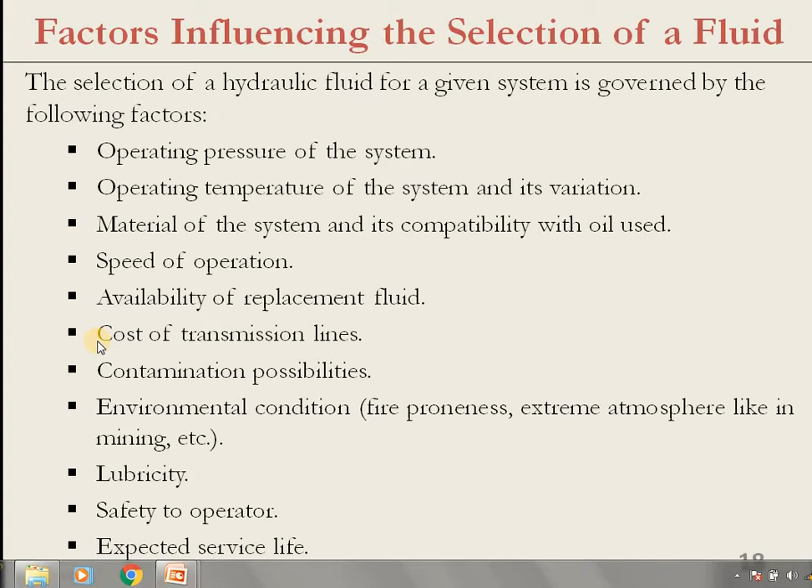Clear? Understood? So next we come to the next topic, lubricating oil additives. Why? We previously studied the different types of hydraulic fluids, properties and functions of the hydraulic fluids, and which parameters to keep in mind while selecting any hydraulic fluid for an application. We discussed all those things. At the same time, if you come to the functions of the hydraulic fluid, one function is lubricating, that is, the hydraulic fluid acts like a good lubricant. That is a very important thing.

At the same time, if that hydraulic fluid is working at a higher pressure, the properties of the fluid are going to change. Is that right? So in order to maintain those properties of the hydraulic fluid at the normal stage, you can go with some additives. You can add some additives to enhance the properties of that lubricating oil. That's why you can concentrate on these additives.

Additives means what? It is an external agent, right? You can add it into the hydraulic fluid to enhance its properties, nothing else. Okay, so that is the first point. In the first point I am telling you, lubricating oil additives are used to enhance the performance of the lubricants and functional fluids. Okay, so this is the lubricating oils.

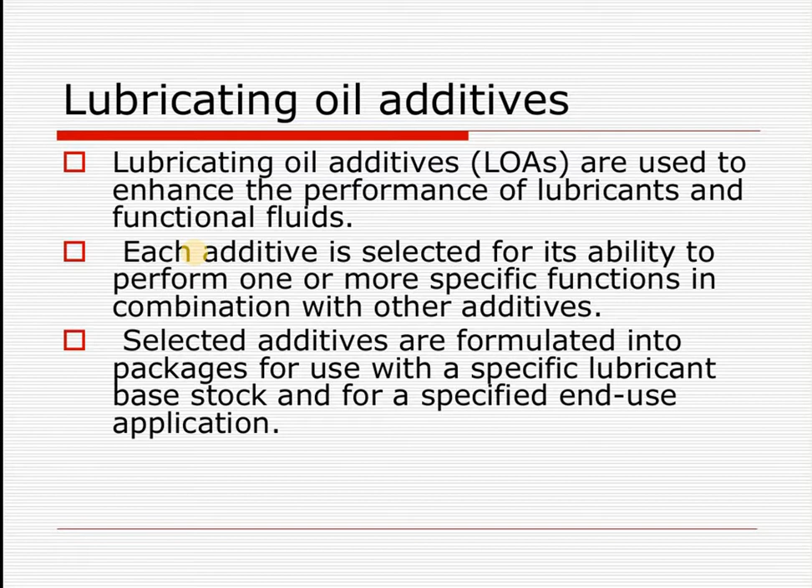Selected additives are formulated into packages for use with the specific lubricants, the base stock, and for the specified end use application. So if you come to the classification of lubricant additives, basically there are three types. First one is the surface protective additives, second one is the performance enhancing additives, and third category is the lubricant protective additives. These are the main three different additives for the different applications.

If you come to the first category, that is surface protective additives, in that there are total 6 type additives like lubricity additives, anti-wear additives, extreme pressure additives, tackiness additives, corrosion and rust inhibitor additives, and detergent additives. These all come under the surface protective additives.

The second category, performance enhancing additives: viscosity index improver, pour point depressant, demulsifier, emulsifier. These 4 additives come under the performance enhancement of the lubricants. And third one is the lubricant protective additives: oxidation inhibitors, foam inhibitors. Clear? So this is a brief classification of the different lubricant additives for the different applications. We will discuss one by one.

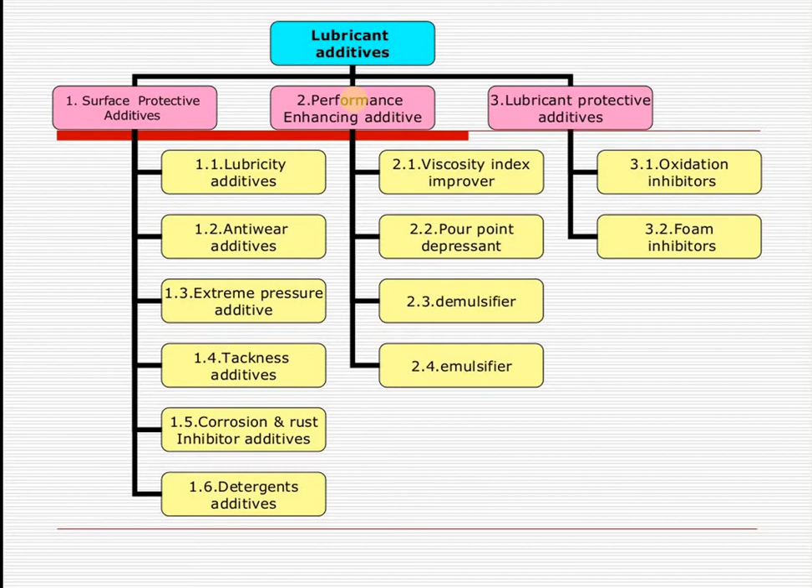So first one is the lubricity additives. Simple, you can just remember it is an additive which is used in the hydraulic system to enhance the lubricity property of the hydraulic fluid. That's it. That is the main advantage of the application of these lubricity additives.

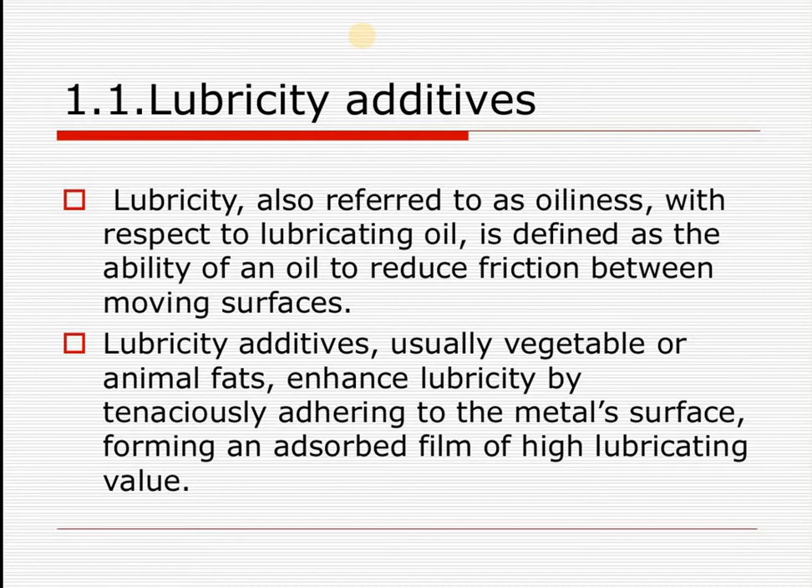Lubricity, also referred to as oiliness, with respect to lubricating oil is defined as the ability of an oil to reduce the friction between the moving surfaces. Lubricity additives, usually vegetable or animal fats, enhance the lubricity by tenaciously adhering to the metal surface, forming an adsorbed film of high lubricating value.

And the second additive is the anti-wear additives. You can just remember simple words; for more information I am putting the presentation here. So anti-wear additive means what? You can minimize the wear or the friction between the moving parts. In order to reduce that, you can add some additives into the hydraulic fluid, so you can achieve lesser frictional losses. Clear? So anti-wear additives work by coating the metal surfaces.

If light metal to metal contact is made, the heat from the friction melts the additives, forming a liquid layer between the surfaces. This molten additive layer, being softer than the metal, acts as a lubricant, preventing the wear of the metal surface. Simple. So that is the anti-wear additives.

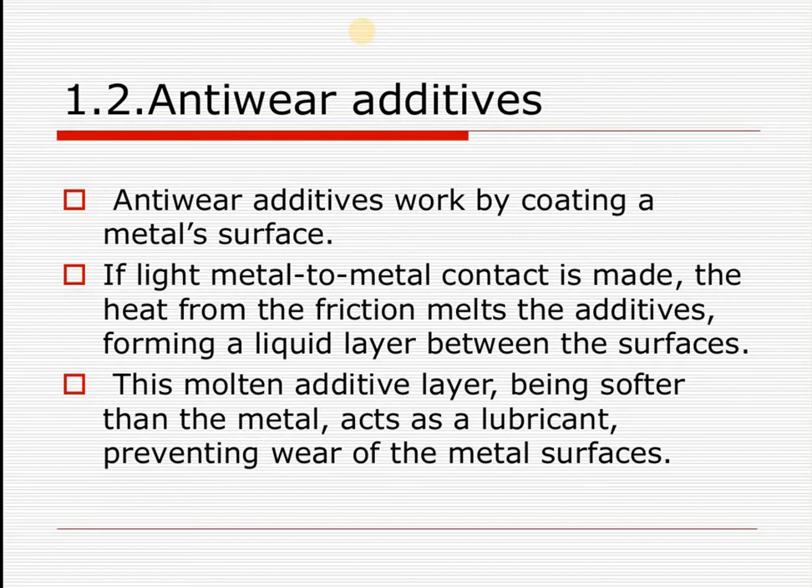So we can make the coating on the metallic or moving components. Once there is movement between the two components, this anti-wear additive will melt and form a liquid layer between the moving components. So it will act like a lubricant. That is the anti-wear additives.

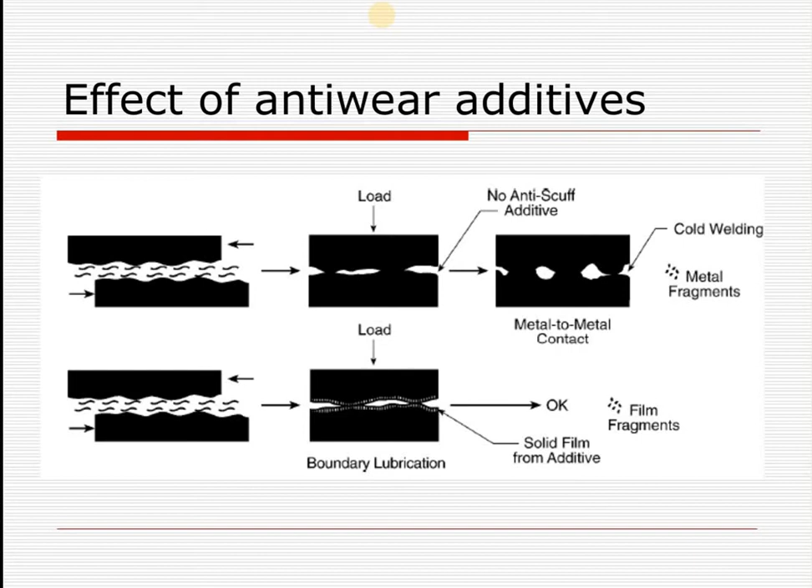This is the effect of anti-wear additives by figure representation. Just see, that is the first figure. The load is applied, then no anti-scuff additive. So that is the boundary layer. So that is how it helps to avoid the friction.

Next is the extreme pressure additives. Extreme pressure additives work by reacting with the metal to form a compound that acts as a protective layer on the metal surface.

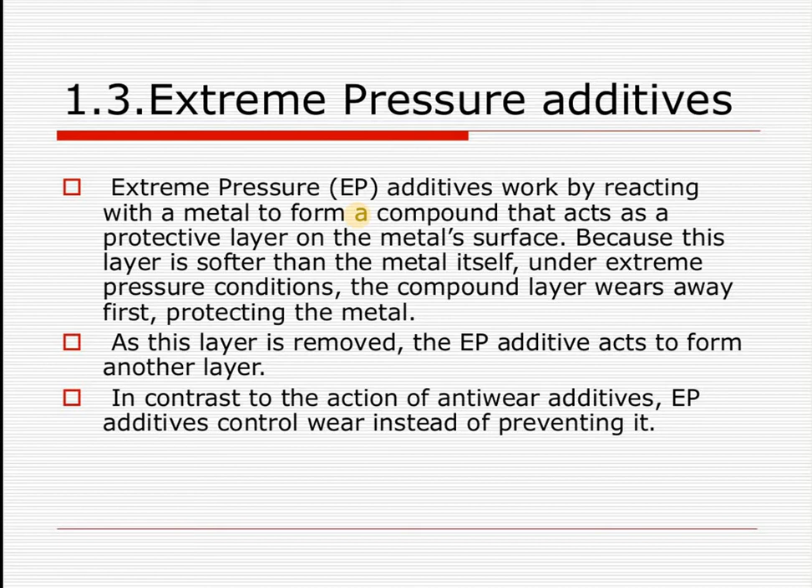Because this layer is softer than the metal itself, under extreme pressure conditions the compound layer wears away first, protecting the metal. As this layer is removed, the extreme pressure additive acts to form another layer. So in contrast to the action of anti-wear additives, extreme pressure additives control the wear instead of preventing it.

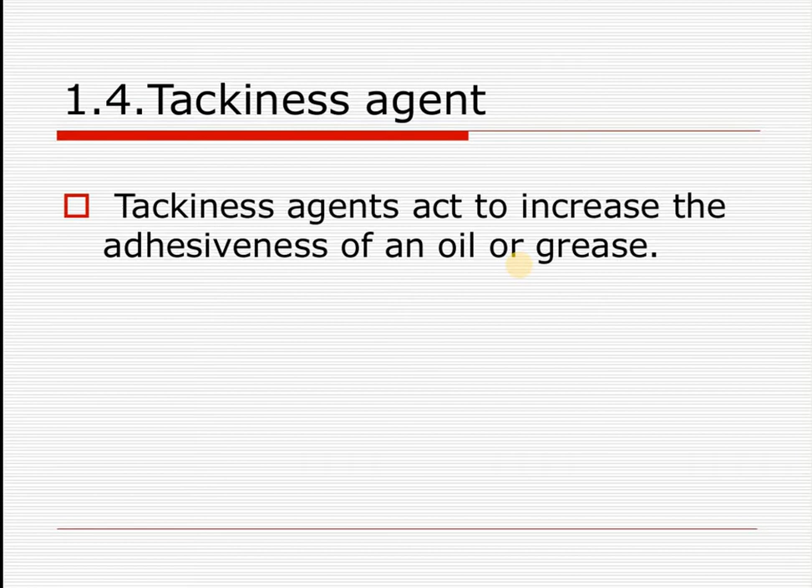Okay, then there is the tackiness agent. Tackiness agents act to increase the adhesiveness of an oil or greases. Next is the corrosion and rust inhibitors. Rust inhibitors protect ferrous, that is iron or steel parts, by forming a film on the parts that resists attack by water. Corrosion inhibitors act in a similar way to protect the non-ferrous parts and also act to neutralize acid with basic compounds such as calcium carbonate.

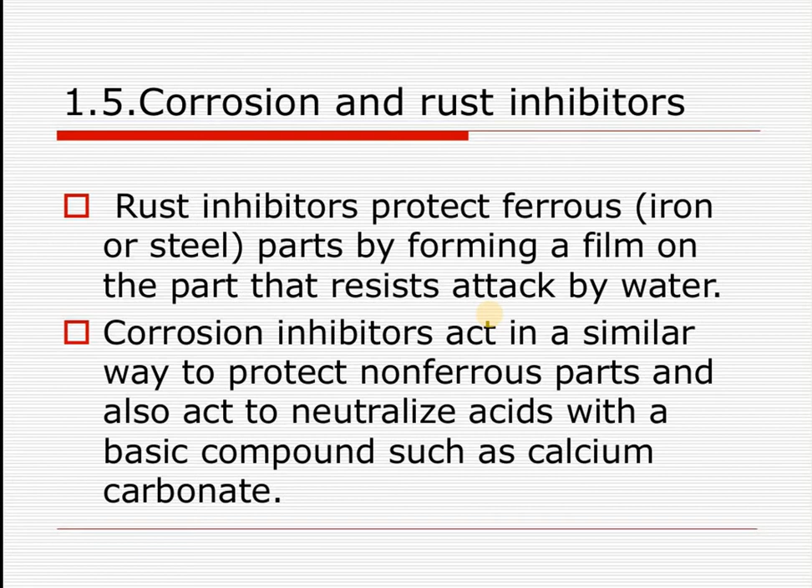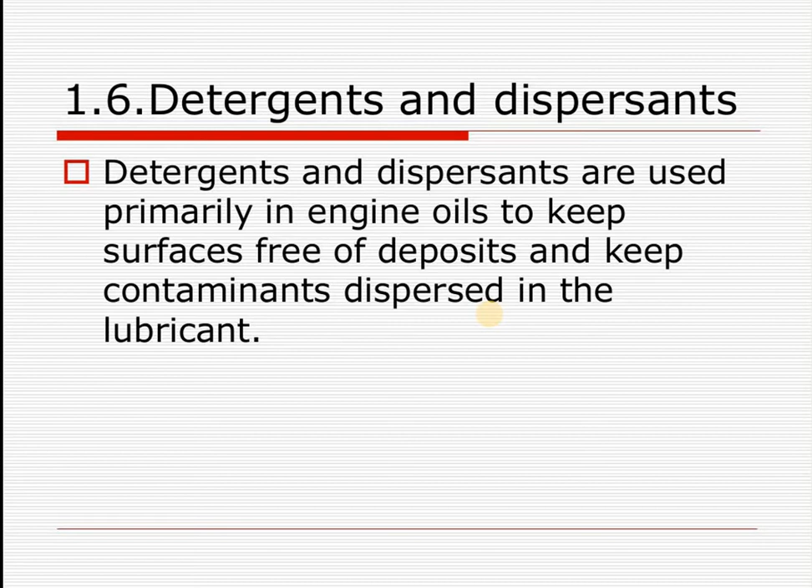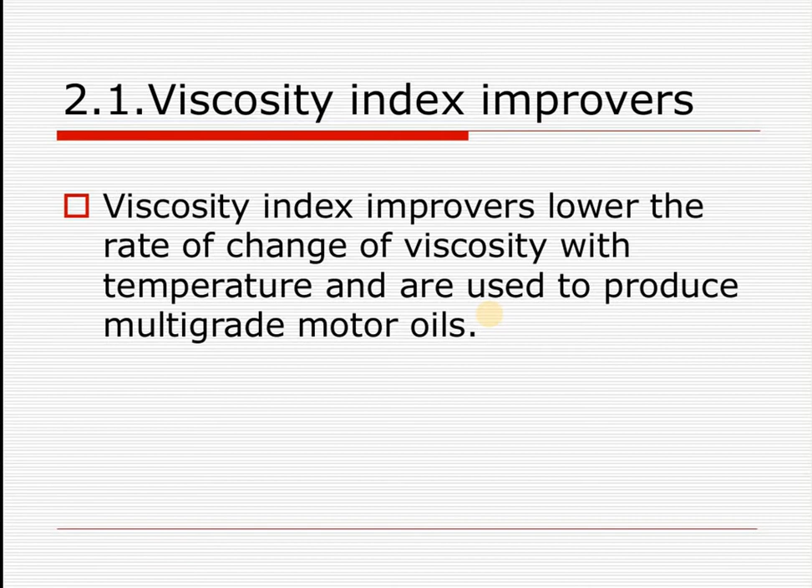Detergent and dispersant. Detergents and dispersants are used primarily in engine oil to keep surfaces free of deposits and keep contaminants dispersed in the lubricants. Okay, viscosity index improver. Viscosity index improvers lower the rate of change of viscosity with temperature and are used to produce multigrade motor oils. Then pour point depressant. Pour point depressants enable lubricants to flow at a lower temperature.

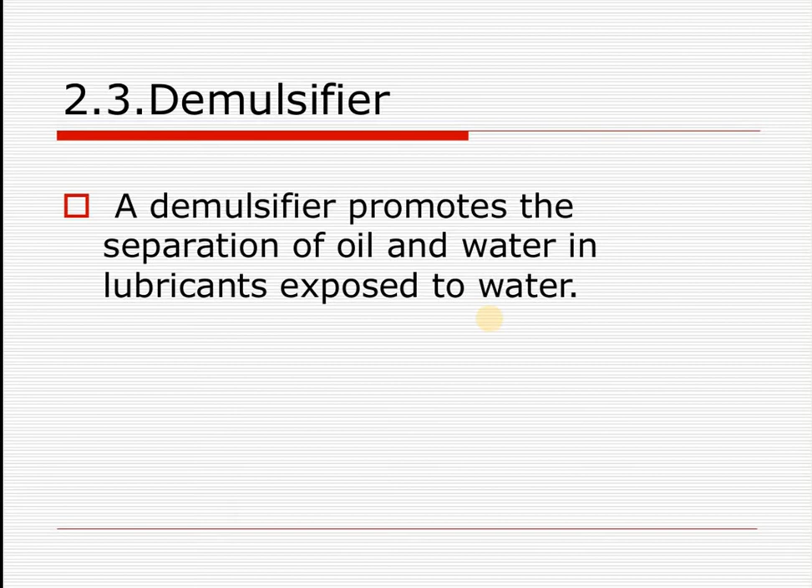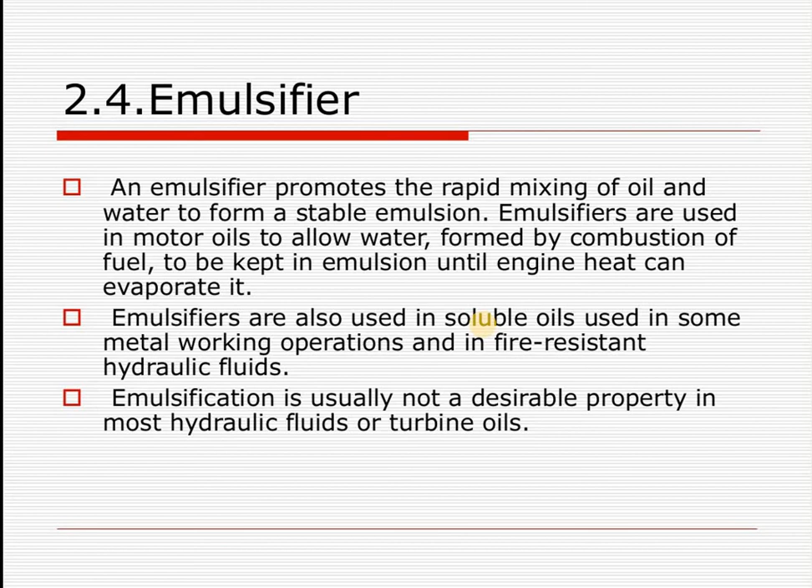Demulsifier. A demulsifier promotes the separation of oil and water in lubricants exposed to water. Then emulsifier. An emulsifier promotes the rapid mixing of oil and water to form a stable emulsion. Emulsifiers are used in motor oils to allow water formed by the combustion of the fuel to be kept in emulsion until engine heat can evaporate it. Emulsifiers are also used in soluble oils used in some metalworking operations, and in fire resistant hydraulic fluids. Emulsification is usually not a desirable property in most hydraulic fluids or turbine oils.

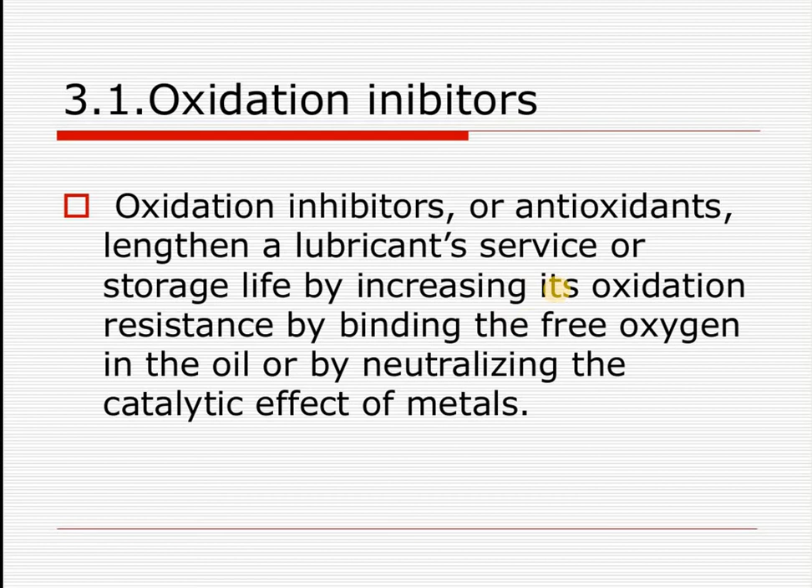Oxidation inhibitors. Oxidation inhibitors, or antioxidants, lengthen the lubricant service or storage life by increasing its oxidation resistance by binding the free oxygen in the oil and the catalyst effect of metal. Foam inhibitors. Foam inhibitors prevent lubricant foaming by decreasing the surface tension of the air bubbles, allowing them to combine into larger ones which break more rapidly. While discussing the properties of hydraulic fluids, the foam resistance property comes into the picture. So in order to decrease foam formation, you can use foam inhibitors, which decrease the formation of foam in the hydraulic fluid.

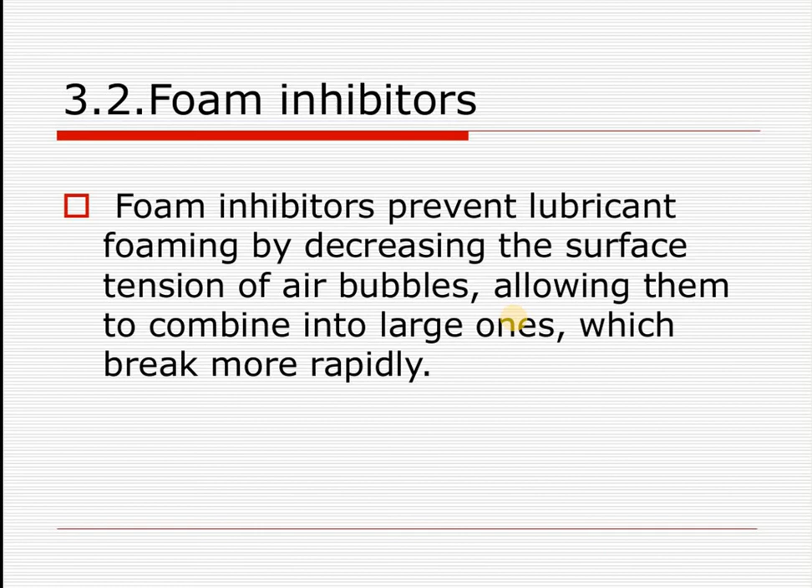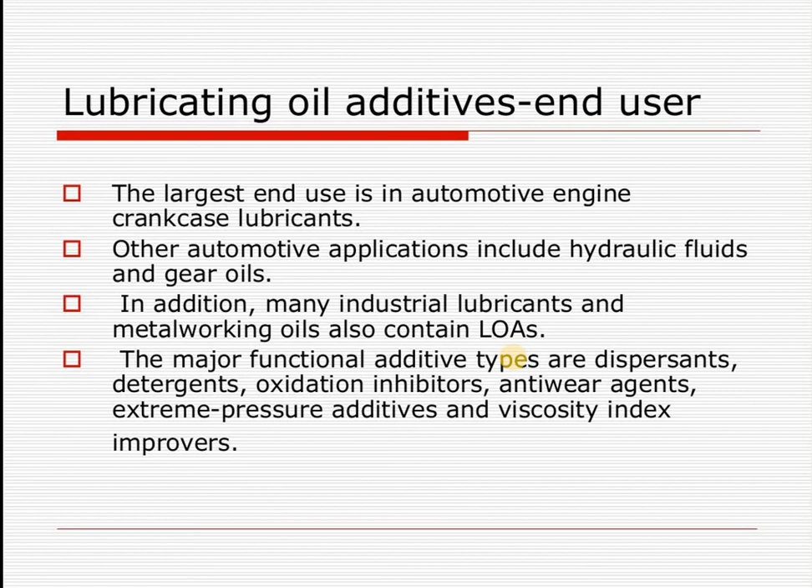Lubricating oil additives, that is, end users. The largest end use is in automotive engine crankcase lubricants. Other automotive applications include hydraulic fluids and gear oils. In addition, many industrial lubricants and metalworking oils also contain lubricating oil additives. The major functional additive types are dispersants, detergents, oxidation inhibitors, anti-wear agents, extreme pressure additives, and viscosity index improvers.

One more topic we're going to discuss is the effect of temperature and pressure on the hydraulic fluid. First, the effect of low temperature. When hydraulic equipment is exposed to cold temperatures, rubber components such as seals, fittings, mounts and hoses can be seriously damaged during operation. It is important to check exterior rubber components for cracks or tears before starting the system, and always have replacement parts on hand just in case something is damaged.

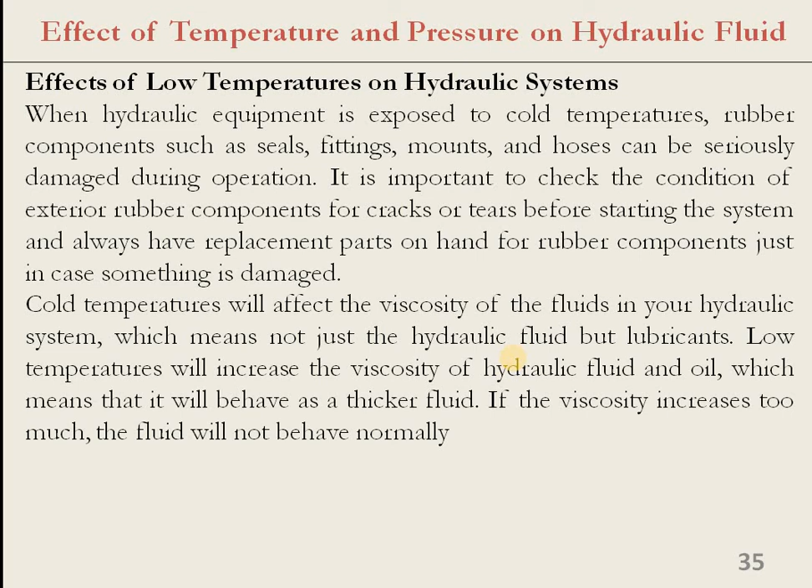Cold temperatures will affect the viscosity of the fluid in your hydraulic system, which means not just the hydraulic fluid but lubricants. Low temperature will increase the viscosity of the hydraulic fluid and oil, which means it will behave as a thicker fluid. If the viscosity increases too much, the fluid will not behave normally. Then the effect of higher temperature on the hydraulic system.

When hydraulic fluid and lubricants are exposed to high temperatures for extended periods of time, the fluid will begin to experience permanent deterioration and a severe reduction in viscosity. That is, the fluid will be much thinner and less viscous. The deterioration of hydraulic fluid leads to oxidation and the formation of problematic sludge. At the same time, the fluid will experience chemical reactions between degrading additives, all of which seriously compromise the performance of the fluid and the hydraulic system as a whole. So this is what we discussed about the effect of temperature on the hydraulic system. In a similar way, the pressure parameter will also affect it.